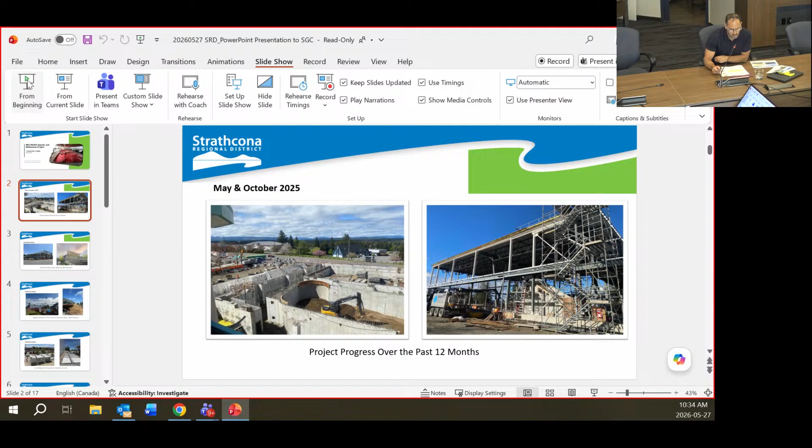Thank you, Edie. Before getting into today's update, I would like to take a moment just to reflect on how far the project has progressed. I have chosen a couple of images. The one to the left was taken a year ago, exactly in May 2025. You can see the incredible amount of work that it took just to have all that concrete for the basement and all the basins, the 4 pools.

The next image showing to the right was taken 6 months ago, when we had all the structures still being erected in construction of the roof. These images highlight the substantial amount of work that has been completed across the facility, from structural construction building to the advancement of major mechanical, electrical, envelope, and pool systems.

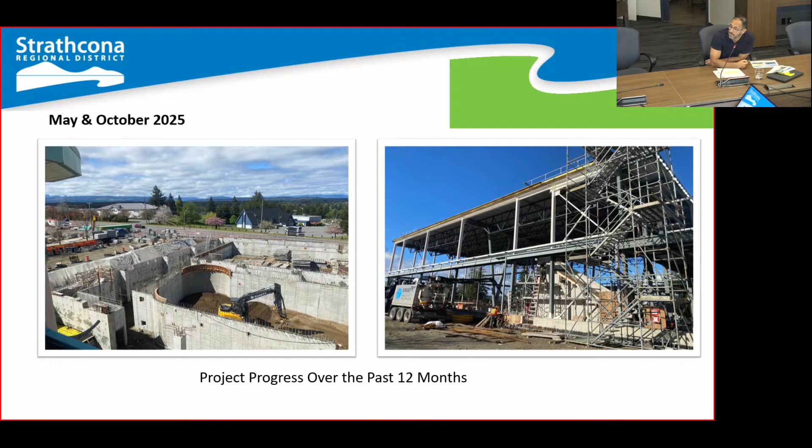The next image on the left side shows the status of the project, showing the significant transformation that has occurred over the last 12 months. All areas of the facility have now transitioned into interior finishes, pool equipment installation, and soon preparing for commissioning. The photo to the right shows the final rendering, providing a glimpse of the completed facility and the vision that is becoming a reality.

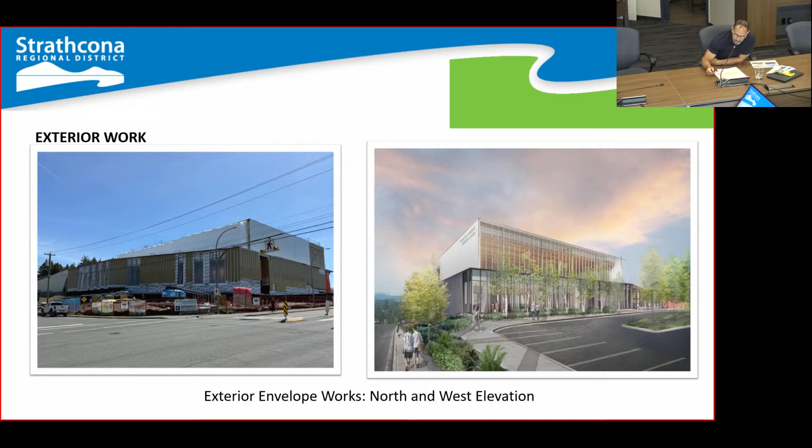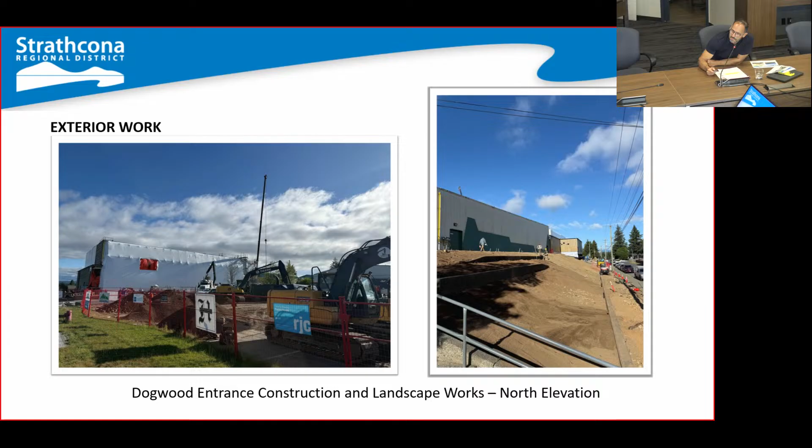Now getting into the construction activities happening on site right now. We can see a photo on the left side of civil work, the construction of the new Dogwood entrance that started a couple of weeks ago and is anticipated to be completed in July. To the right, we can see landscape work for phase 1 and phase 2, both for the wellness and the new aquatic center on the north side of the facility adjacent to Pinecrest. This work is progressing and is anticipated to be completed as well end of July.

We have the last set of air handling units, I believe there are 7 pieces that were lifted yesterday. They're going into place in those curbs you see on the right side, located on the east side of the facility, adjacent to the existing one that soon will be demolished.

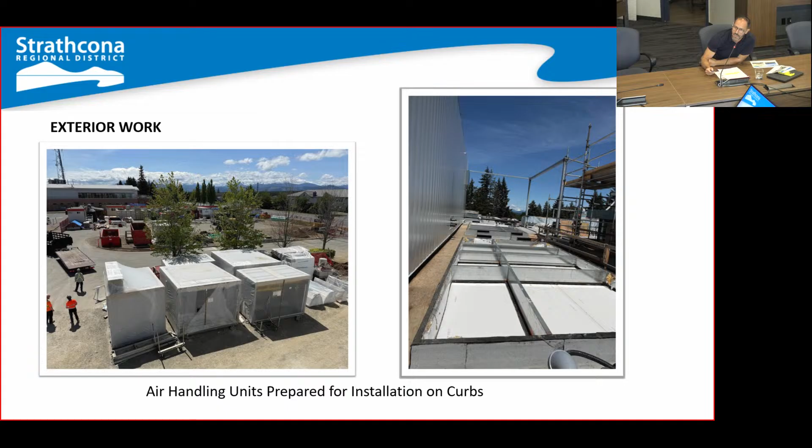On the left side, you can see one of the air handling units being lifted and into place on the east side, and you can see the hydronic piping being installed that connects the piping coming from the new facility into the boiler and also into the cooling towers. To the right side, some of the previous air handling units that have been lifted and installed, and you can see the installation, the connections being performed at this time.

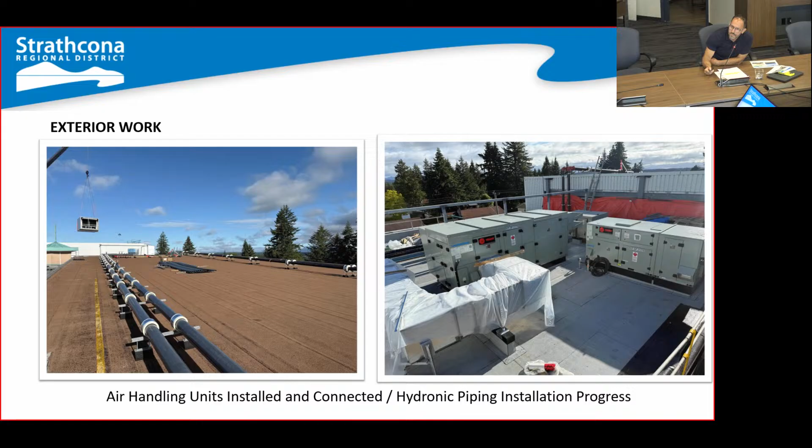Now moving into the interior, work happening in all the basins. The image to the left shows the lap pool being tested. It's very difficult to see, but the lower section of the pool, or the deepest section, has water. All the leaks identified three weeks ago have been fixed and rectified.

This pool has now passed all the testing and is ready to be tiled. You can see the work happening in the background with all the steel stud and gypsum board. They're closing, mudding, taping, and painting. You can also see the architectural ceiling finishes for the higher natatorium being completed for both the leisure and lap pool.

The image to the right shows final preparation of the leisure pool before they start tiling. Around the pool, whatever you see in red is the waterproof membrane happening everywhere in this natatorium, both lower and upper. So things are looking great. These are milestones that we were waiting for.

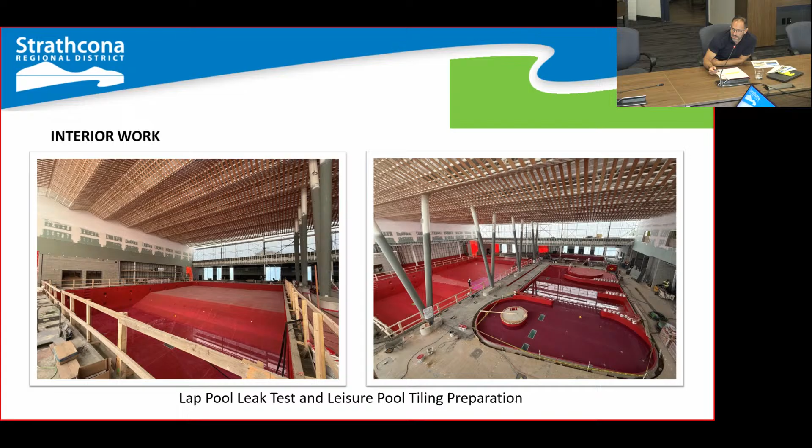All four pools have been tested and everything has passed, and we have started with tiling. The wellness pool is the first one to receive tiling. It's a little bit difficult to see in this image, but we're hoping that in my next presentation we can start seeing more of the contrast between these architectural finishes and the rest of the facility. Tiling has started, and we anticipate a number of crews working really hard within the next weeks to make sure that we meet the final line.

On the right side, you can see the final preparation of the hot tub. All the jets have been installed, and everything is ready to start tiling as well. Adjacent to that basin, the deck has also been waterproofed. In that lower natatorium where the wellness and hot pool are, we haven't installed the architectural finishes yet. This has to be done towards the end of the project in order to allow the tiling to go first.

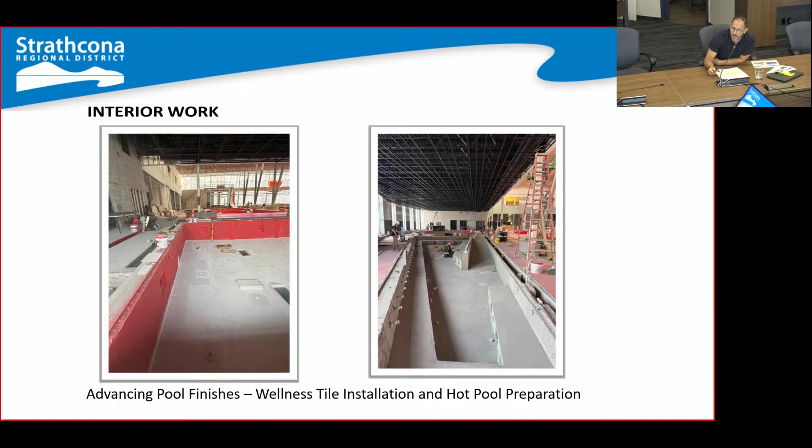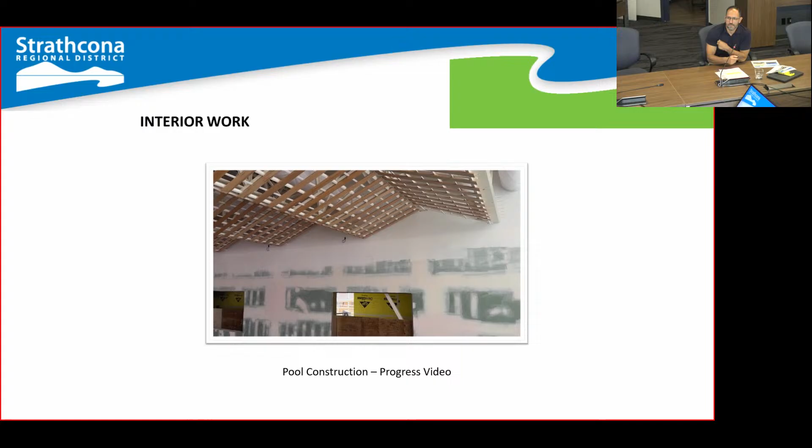Yeah, I'm well known for that. My videos are very low key.

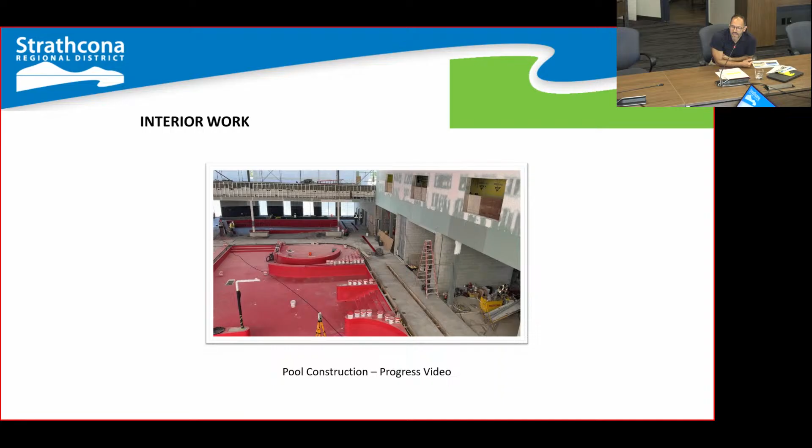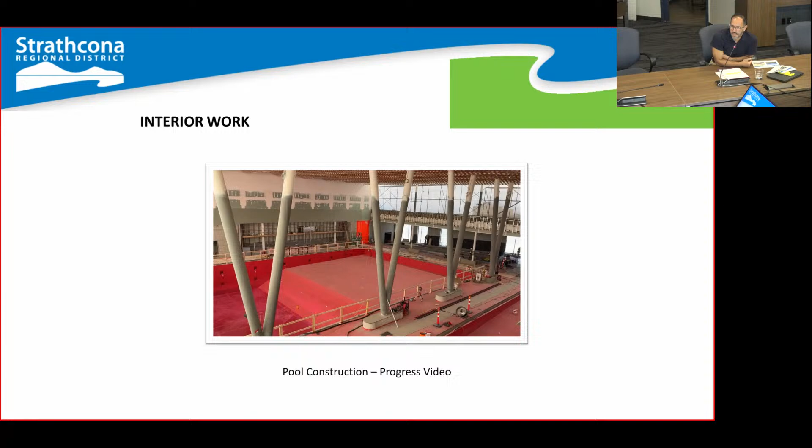To the right, what you're seeing is what's going to be the temporary entrance, the vestibule. You're seeing right now the leisure pool and lap pool, and on the left side is where people are going to be sitting, watching, or supporting the families and kids in all the swimming competitions.

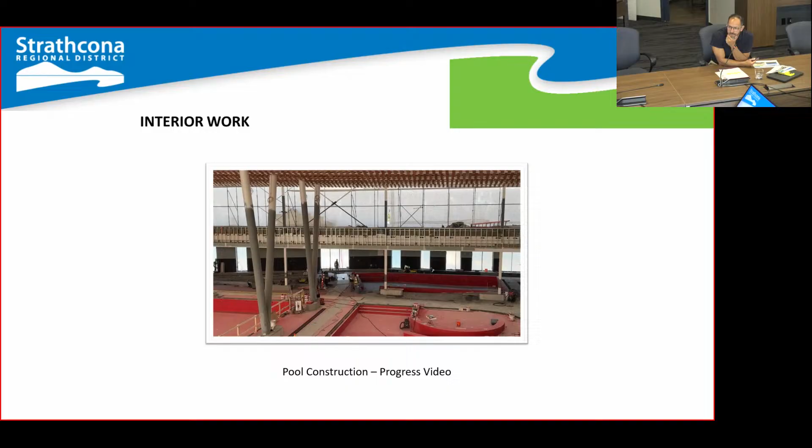Yeah, just a lot of work. Not a lot of workers at that time. I took this video during lunchtime, which is easier.

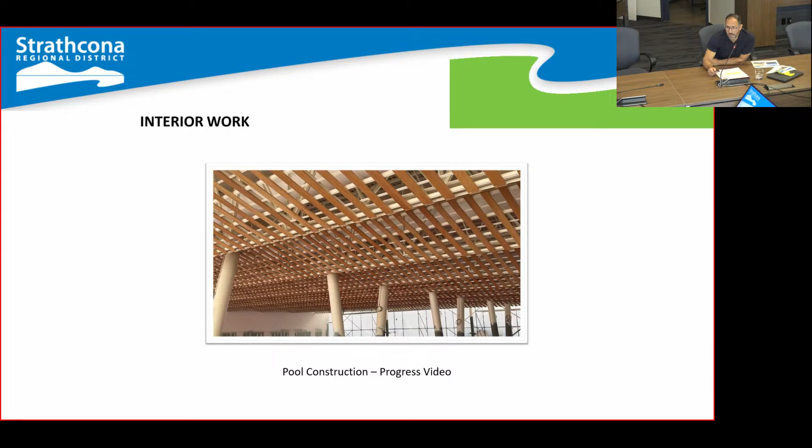You can see that all mechanical and electrical on top has been completed as well, along with the architectural finishes.

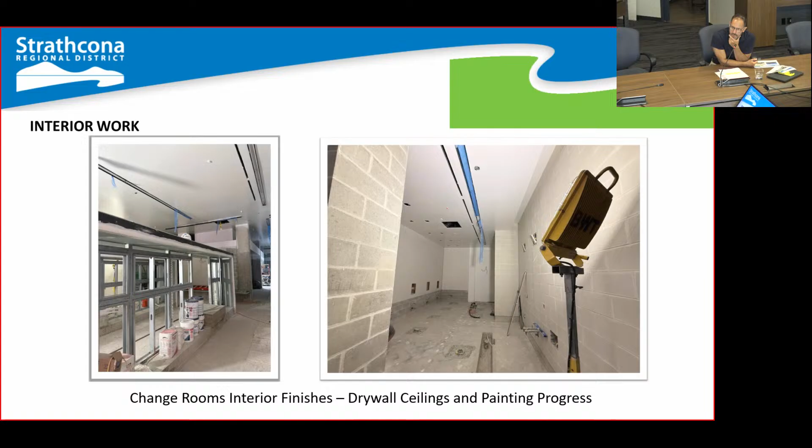Moving into the change rooms, a lot is happening in these areas, all architectural finishes as well. You can see the gypsum board being placed on the ceilings, light fixtures, and anything related to lockers. They're doing a lot of painting and finishing. The floors are also being prepared so they can start tiling. All these areas will be tiled, except for the CMU, the concrete masonry walls, which will be painted.

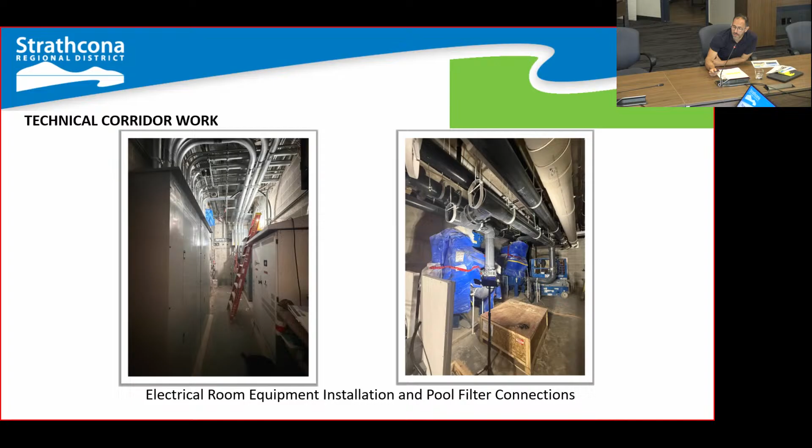So I think the milestones are to make sure that we install all the pool systems, connect them, and start with the commissioning, and also ensure that at the top of the deck level all the tiling goes on so we can start filling the pools.

More connections happening to the surge tanks, as shown on the image to the left. You can see now the minimal space that is left, but enough for operations and maintenance to work in. There's an incredible amount of piping, everything related to fire suppression systems, heating pipes, electrical and mechanical.

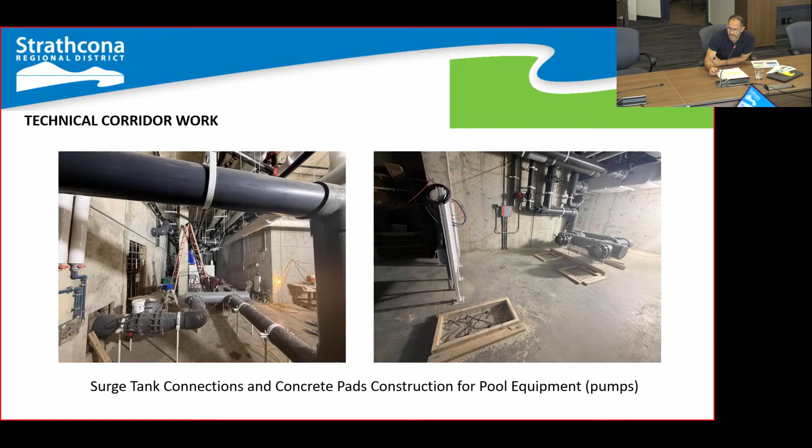To the right, we can see the last pieces of concrete for this project. There are just some concrete pads that are going to be poured this week, before we can receive the pumps we've been waiting for a few weeks now to arrive and install them on site.

So we have ongoing activities and upcoming construction work. The Dogwood new entrance is progressing, and as I said, mid-June it will be completed.

Landscaping to the northwest and south is progressing, end of August. The tile at the pool basins and deck is progressing early August. Wellness, hot, leisure, lap basins filled mid-August. Pool slide and the pool accessories will be completed as well in mid-August.

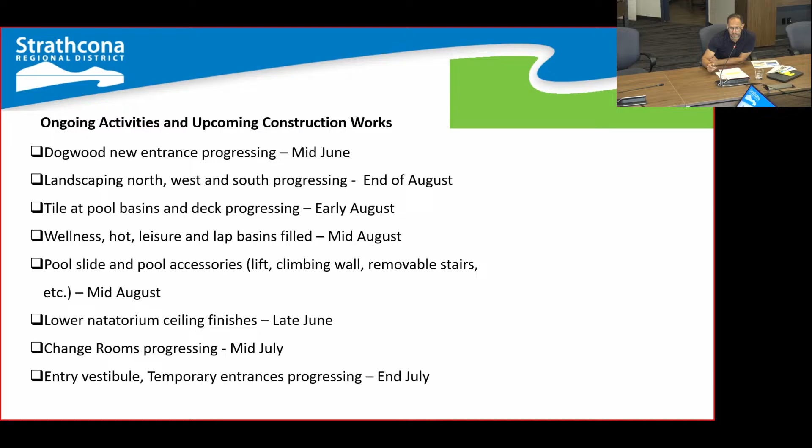We have the lower natatorium ceiling finish late June. The change rooms progressing to mid-July will be all done. The entry vestibule and the temporary entrances, two entrances, one for the arena, one for the aquatic, end of July.

Moving into the cooling tower that is being located in the existing facility, construction scheduled to be completed in July. The glass installation end of July, cladding early August, commissioning from July through September, early September.

Occupancy with the City of Campbell River targeted for early September. Permits with Vancouver Island Health end of September, opening end of September.

Phase, that's when we are already planning and preparing for the Phase 2 Wellness Center, which starts with the decommissioning of the temporary chemical room and the decommissioning of the existing pool and other systems that we have.

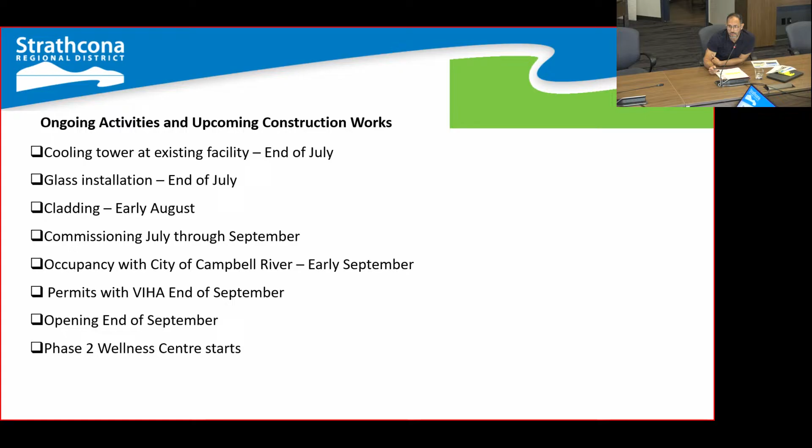So that's what we have coming up. A lot of work, just kind of high level. I have a detailed schedule, so this is just like a summary of that.

The financials for the project, budget status - mentioned it in previous presentations that we have an approved budget of $69.8 million. We have a contract with the builder for $60.7 million that has been signed, including the change orders is $61.7 million. You can see the variance between 60 and 61.7.

We have procured a lot of the owner's components for this facility, such as the wireless access points, sound system, security cameras, all that. We have done it through Heatherbrae because they have the experience and the expertise.

So therefore, those change orders are increasing the contract, but that's something that comes out of the same budget that we have, and it has been estimated in the past, and it's all aligning really well with what we did during the design stage.

We have construction costs certified to Heatherbrae, the builder, to the end of March, $39.9 million.

We have a progress claim coming for April for 2.1. It's not there, but it's in my hands right now. The entire team is reviewing, and we anticipate it will be approved this week.

We have a contract with the prime consultant, the architect, and the engineering team for $1.38 million. We haven't had any significant change orders related to design, and we are up to $900,000 approximately approved.

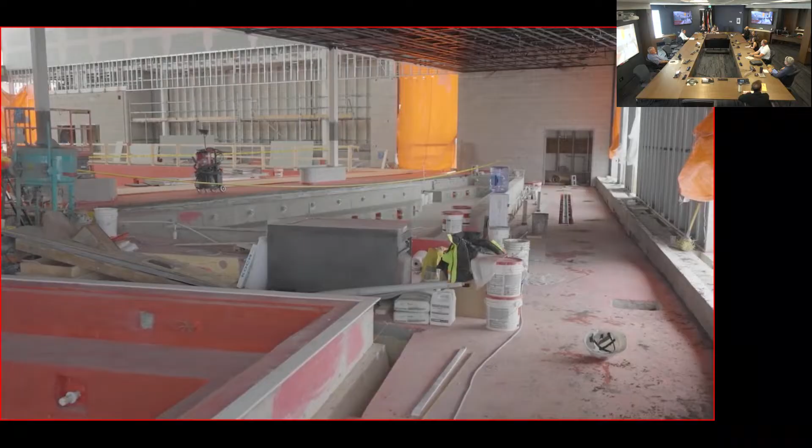As you can see, staff are very much enjoying making these videos. This was me before, a short walk left me tired. We wanted to go with a bit of a rock theme with the music, so sorry Commissioner Dahl, it's not AC/DC for you, but it's still pretty rocky. Video 3 is regarding the hot tub.

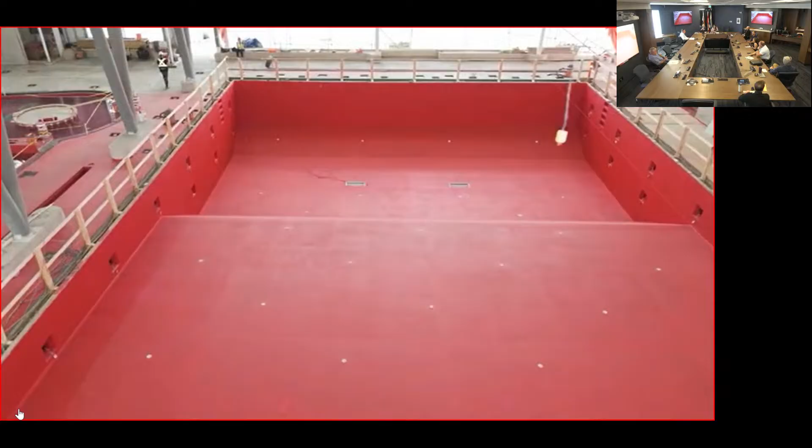Those two will be featured on social in the next weeks and months. We also have some other ones coming up, which would be swim lessons themed, did you know about operations, and then definitely showcasing exciting features like the climbing wall, water slides, diving boards, and so on. Our last two videos will feature the opening stage and what the user experience will be. Open to any questions you may have.

Any questions, commissioners? Having been to Iceland and a number of nice hot pools, some of them offer wine in plastic glasses. I'm just saying, if you want socialization of a certain group, you could look into that. I don't know if it's possible, but I know it happens, in adult-only sessions. Okay, apparently that hasn't flown into staff's heads yet, so we'll see.

Do you have a question, Commissioner Dahl? I was just going to say that Robin could be a lifeguard.